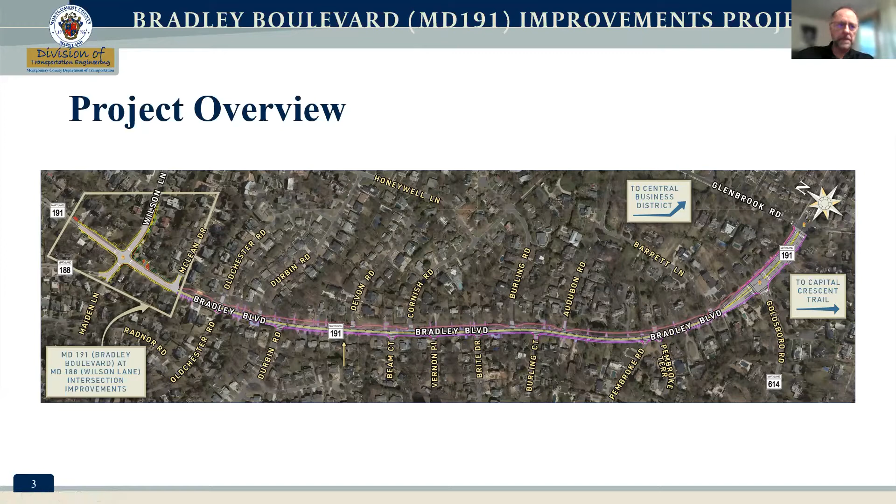Thanks, John. So I'm Mark Roberts with Whitman Requardt, and we are working on the design for this project. I was just going to give a little overview and then some of the history of the project, and then get into what we're working on now. So a little bit of the project overview, of course, in Bethesda, Maryland. And the purpose of this project is to start making connections to some of the missing areas or gaps in the bicycle and pedestrian network.

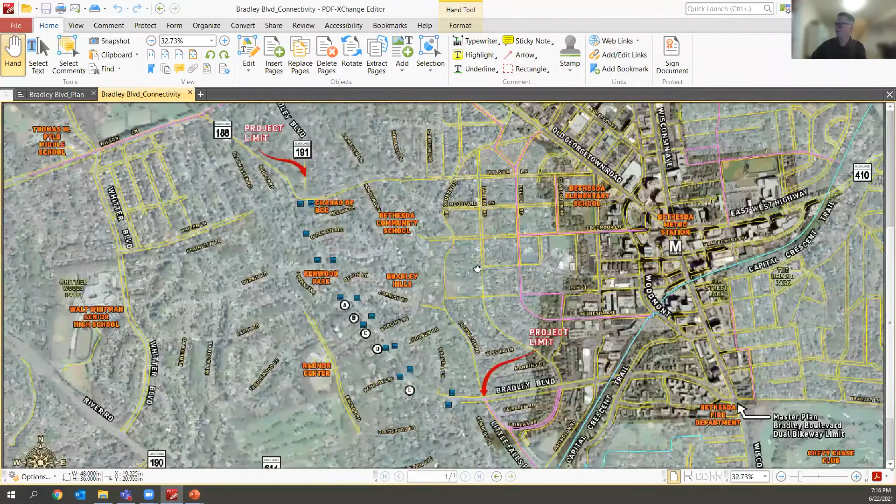I wanted to pull up this drawing, which we actually brought out at the last public meeting several years ago. It shows, it's a little busy, but everything in yellow is existing sidewalks, everything in pink is existing bike lanes, and existing separated paths are in blue, like the Capital Crescent Trail. Our project is here from Glenbrook to Wilson in combination with the intersection project. And you can see there's a gap here in any kind of network.

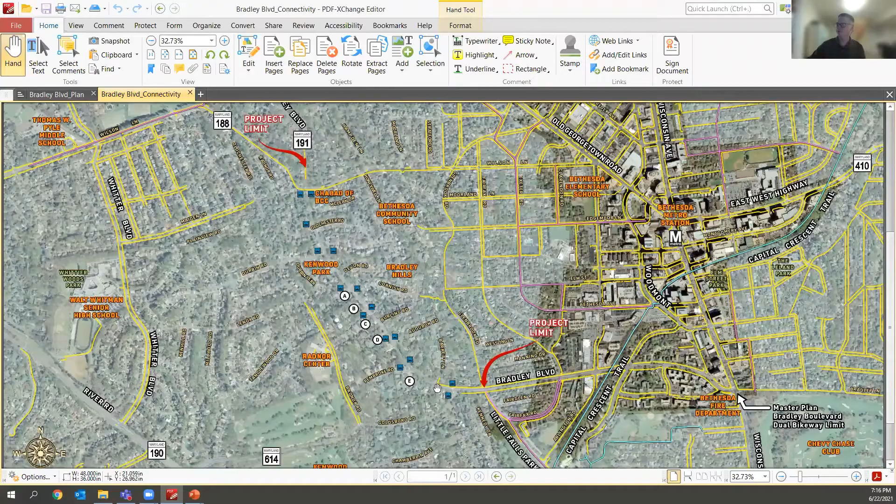And so that's really what we're trying to do, is connect this back up. The project will help improve pedestrian safety, bicyclist safety, and access for all users to transit into the Bethesda Central Business District and other points nearby. A little bit more of the overview.

John mentioned there'll be a shared use path or a side path. It'll be on the north side of the road. And to make sure everyone can orient correctly, that's what we're calling the north side of the road, the odd numbered addresses, the wide right-of-way side of the road. There will also be on-road bike lanes. There'll be a curb and sidewalk on the south side of the road, which is the even number addresses.

There will also be significant stormwater management and drainage improvements. As you're probably aware, there's flooding that occurs at some of the intersections in the corridor. There's not much of a drainage system out there to speak of today, ditch-wise or inlet and pipe system today. So this project would be partially relieving the flooding events as well as managing the stormwater from the new improvements.

There would also be traffic signal reconstructions. The intersection project John mentioned will come first and reconstruct the Wilson Lane signal. And then this project would come later and reconstruct the Goldsboro and Glenbrook signals.

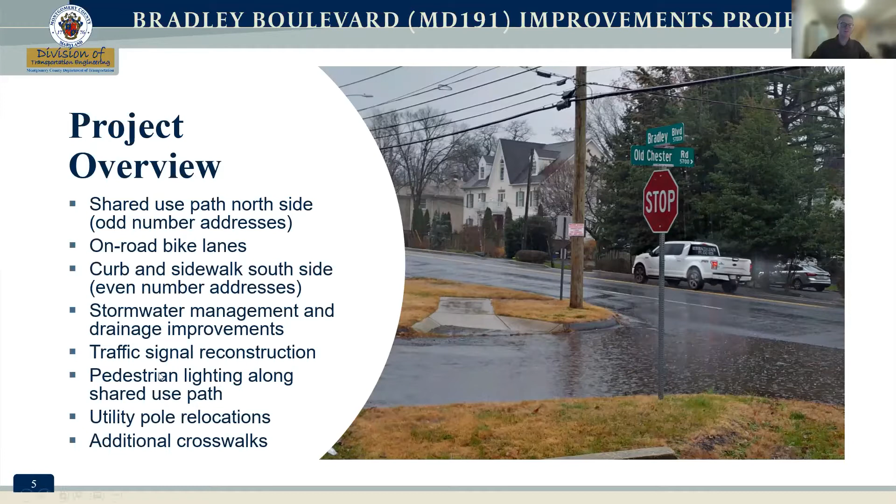So next up, I wanted to go over a little bit of the project history, not too detailed, but just to give you some orientation. It really starts with the master plan from 1990, the Bethesda Chevy Chase master plan, which called even back then for dual bikeways on Bradley Boulevard. Dual bikeways meaning shared use path on one side and then also on-road bike lanes.

And then this project really got its kickoff with a petition from the neighborhood for a sidewalk, and then MCDOT got the project going. In 2000, and I should also say in 2005, the countywide bikeways functional master plan came out and also agreed with the earlier master plan that there would be dual bikeways on this road.

And then in 2009, facility planning phase 1 began. The project, of course, started with the petition for the sidewalk, but we go back to looking at the master plan and the bikeway master plan to guide the planning of this project. There were public meetings in 2009 and 10, and the phase 1 facility planning completed in 2011, and then it was recommended by the county council T&E committee to proceed on to phase 2 facility planning.

That began in January of 2012, and it concluded a little over 3 years later in 2015, ending with a set of what we call preliminary design plans around the 35% complete level. We also had another public workshop at that time.

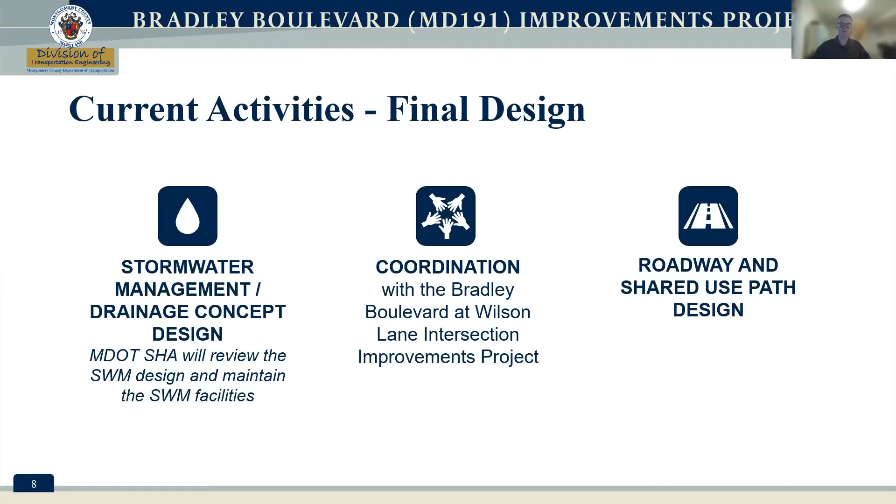Now, this is the heart of, one of the main reasons we wanted to come to you tonight, and that is to go over again - this was out at the public meetings years ago and it's been refined a little bit - the typical section of the project.

Starting on the north side, on the odd address side, we have the wider right-of-way existing condition. This will be the side with the shared use path and utility poles to be relocated.

One feature I wanted to point out with utility poles is that we're going to plan to have them fit between the path and the swale, instead of out on the outside of the path. That will help minimize tree impacts, because utility poles need a very wide swath for clearance to the electric lines. So if the poles were to wind up on the outside, you'd have to start that clearance envelope out here and cut a lot more trees down. But if we put it here, we can take advantage of the space that the shared use path takes up. So that is one key element we're working on.

Next up, you'll have a swale to handle storm drainage and stormwater management for the project, and that varies in width. Then we're onto the road, and the road would become more uniform. Today, obviously, the shoulders vary in width. You'll have two 11-foot lanes, which is down from the existing 12-foot lanes on average. And then there will be bike lanes.

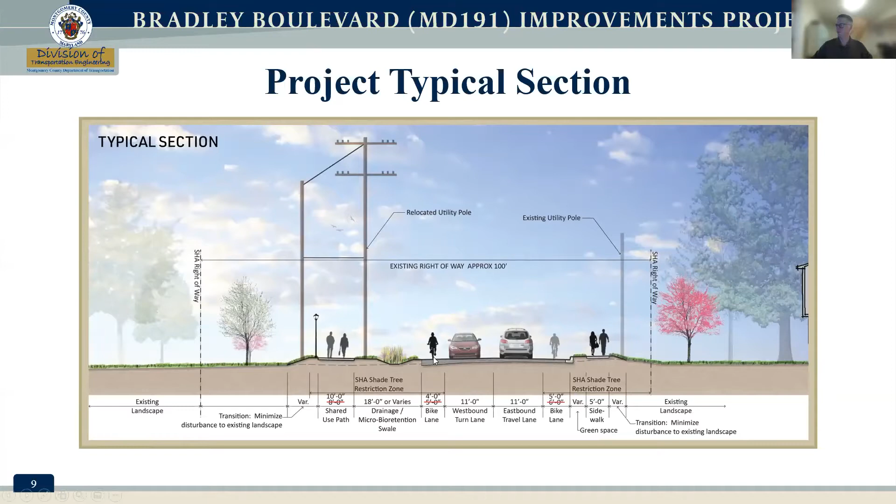Some other efforts are going on. I mentioned earlier, starting to coordinate with utility companies, which includes Pepco, Verizon, and Comcast, and others on the pole lines. There's also going to be some generally minor water and sewer adjustments, hopefully mainly to things like fire hydrants and valves, and we'll do our best to work our design around and minimize these impacts. Same thing with Washington Gas, coordinating with them for any necessary relocations, but trying to minimize those. And of course, landscape design and tree save plans to maximize the number of trees that can be saved with this project.

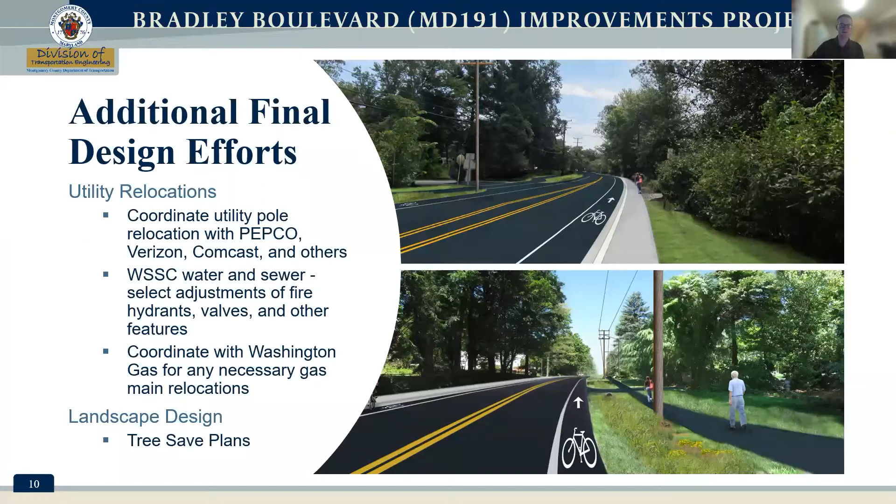Last, some other efforts coming up are the traffic design. I mentioned there'll be more crosswalks. Today there are crosswalks at the signalized intersections, and one unsignalized crosswalk at Bright Drive. After coordinating with State Highway and the County Traffic Division, we are looking to add 2 more unsignalized crosswalks at Durbin Road and Pembroke Road. That would split this corridor between Wilson and Goldsboro into roughly thirds, giving more opportunities for crossing and getting to the shared use path. Other traffic efforts include developing a design for maintenance of traffic during construction, signing and marking, lighting, and traffic signal design.

Before this project goes to construction, there will be a public hearing that could occur sometime next year or into the following year.

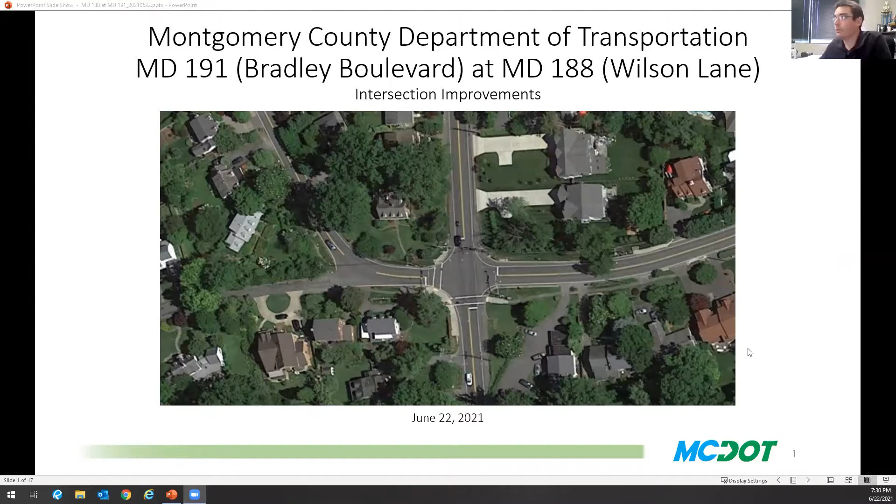As mentioned, my name is Mike Giuliano. I work for SCV Incorporated, and I'm working as the consultant project manager for the intersection improvement project located at Bradley Boulevard and Wilson Lane. I've got a few slides here to discuss with you all and share what we're doing. As mentioned, this is a breakout project that the county brought out. It's going under as part of their spot improvement CIP.

It came out from the review comments as part of the Phase 1 study from the Bradley Boulevard Bikeway Facility Planning Study, which recommended left turn lanes be installed for all 4 approaches at the intersection. This is reinforced in the 1990 Bethesda Chevy Chase Master Plan, which recommends adding dedicated left turn lanes to reduce delays at the intersection. So that's a little background information.

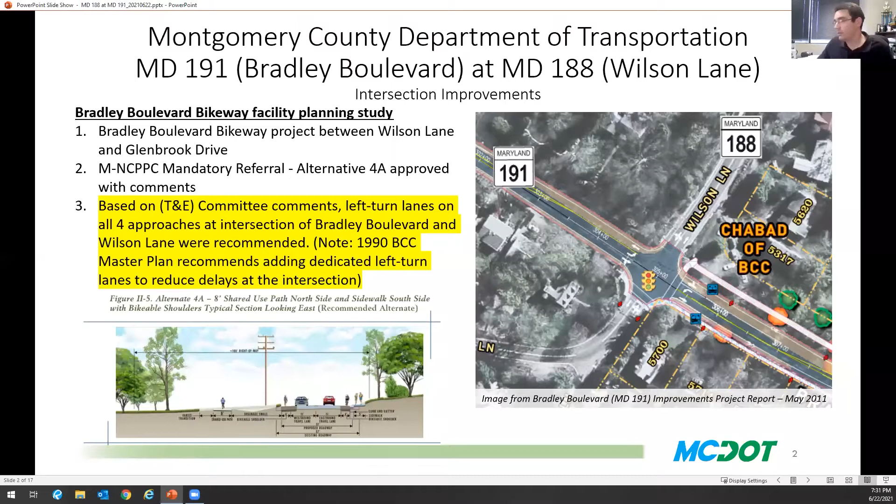The first part of our project began with a traffic study. We went out and collected traffic volumes in 2019 to prepare a synchro analysis, which will help determine the operational impacts of the project. We compared that with existing conditions to determine the required length of proposed left turn lanes needed for each direction, and also if any additional left turn signal phasing was needed. The study began in 2019 and concluded in 2020 with SHA's approval.

The bottom table here indicates the total turn length that was required based on the analysis, which stemmed from the volumes collected. Each direction was different, due to the number of vehicles. The tables on the right show the existing operational data and the proposed, indicating the delay shown for each condition. In the existing condition, during the AM peak hour, there was about a 17-second delay overall for the intersection. In the PM, it was 30 seconds, so a little more drastic. With the proposed conditions, we see a slight improvement in the AM and a more significant improvement in delay in the PM.

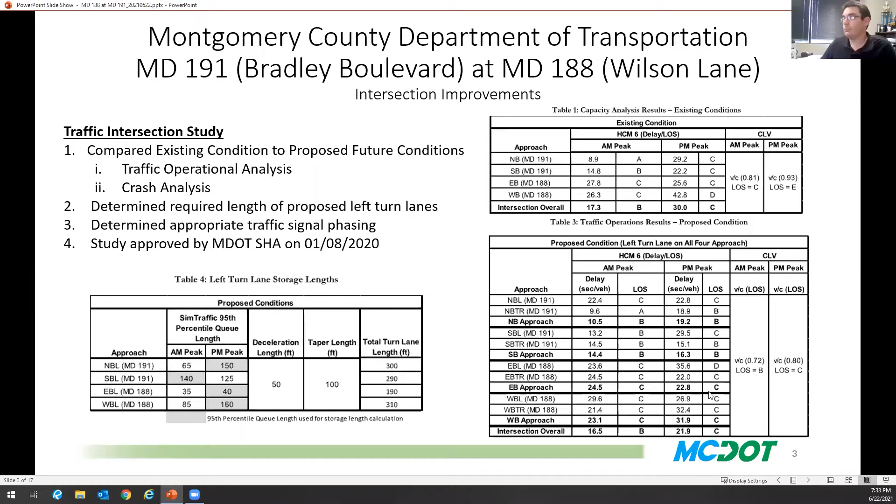Going forward, after getting approval on the study, we advanced our design. The geometric improvements include widening along both 191 and 188 within the right-of-way. This more significant widening is along the north side of Bradley Boulevard. We're adding dedicated left turn lanes for all approaches, and 5-foot bike lanes along Bradley Boulevard within our project limits. All existing sidewalk out there will be rebuilt to be 5 feet wide and concrete. In addition, if you're familiar with the intersection, there's a section where the sidewalk along the south side of Bradley just ends. We'll be connecting that to the intersection so pedestrians can utilize the existing pedestrian crossing.

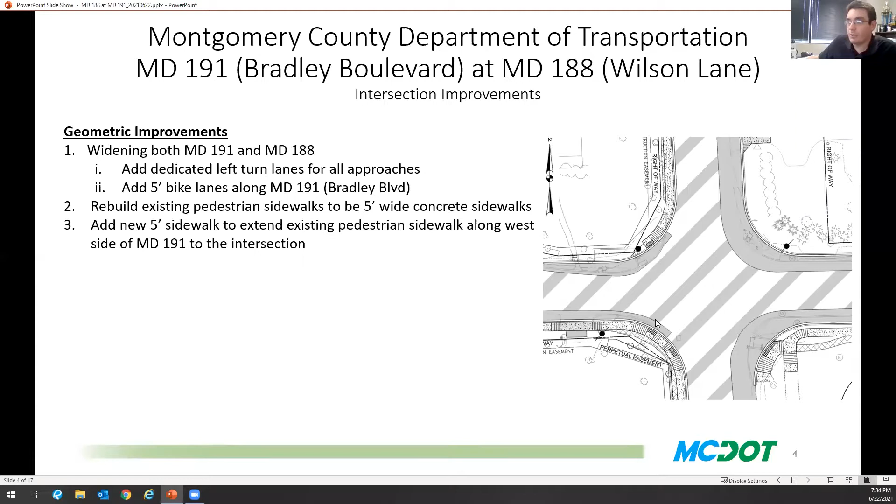This gives you a little overview of what it'll look like along Wilson Lane. Our project limits extend - looking north is straight up on your screen here. To the west, along Wilson Lane, it's about 200 feet. To the east, towards Bethesda, it's roughly 400 feet.

Along Bradley Boulevard to the north, the project extends about 350 feet from the intersection, and to the south roughly 300 feet, basically to McLean Drive.

Our improvements are working hand in hand with the bikeway project to make room to account for the shared use path, which you can see here. It's a general location until design is started, but we're making provisions so there is room to connect the shared use path all the way up to the intersection.

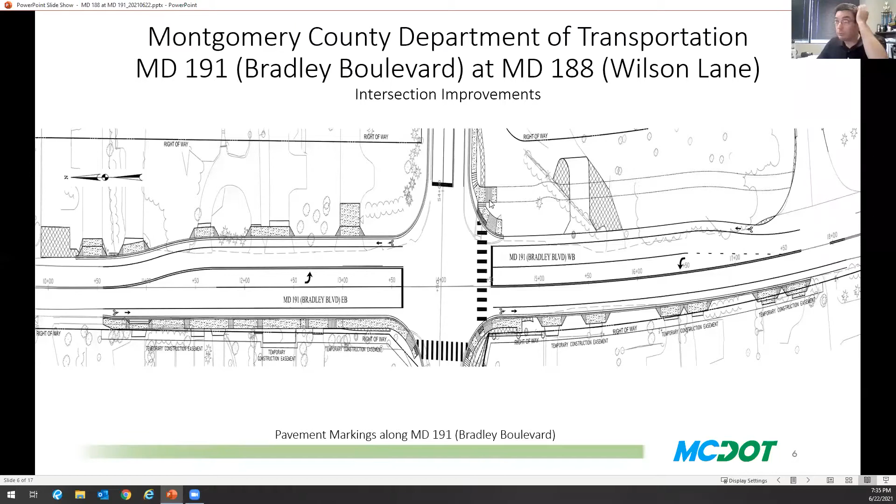As Mark mentioned, there are significant drainage deficiencies in this area, and at the intersection, pretty much non-existent infrastructure when it comes to drainage. So we will be rebuilding that, adding a lot of storm drain pipe and new inlets throughout the intersection and the project limits.

As part of the project, being in SHA right of way, we do have to go for an SHA access management permit to do the work within their right of way, so there are certain requirements when it comes to drainage and stormwater management that we have to meet.

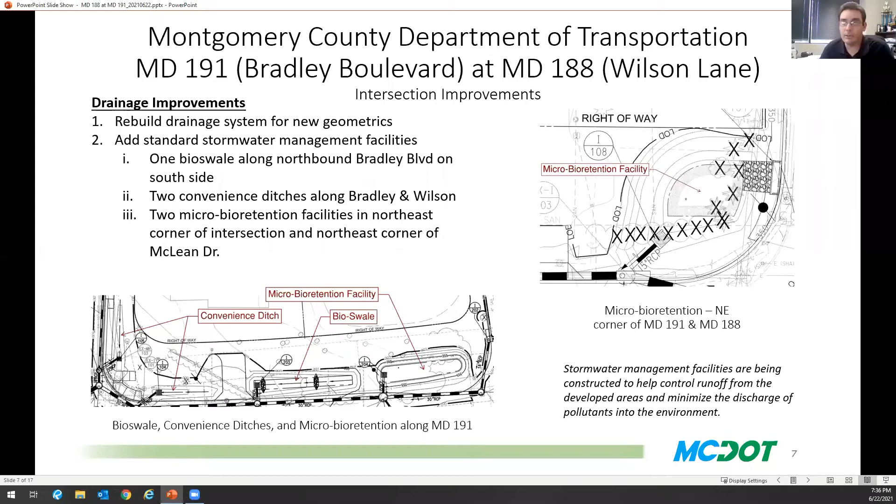As part of that, we are introducing one bioswale along Bradley Boulevard, in between the intersection and McLean Drive on the south side. We also have a couple of conveyance ditches along with two micro-bioretention facilities: one in the northeast corner by McLean Drive, and the other in the northeast or northwest corner of the intersection of Bradley and Wilson. That's to meet the stormwater management criteria the state is holding us accountable for.

In addition, with every widening project, we have a number of utility poles being relocated, as well as I think three fire hydrants. There's also a new air vent main box that was installed previously that needs to be relocated, which we're working with WSSC to get approvals on.

For the most part, everything is within the right of way. There is a small section at the southeast corner where we need to get a perpetual easement because of drainage with the new alignment. There are also a number of temporary construction easements, since we're doing work tying into existing driveways along the south side of Bradley Boulevard and along Wilson Lane.

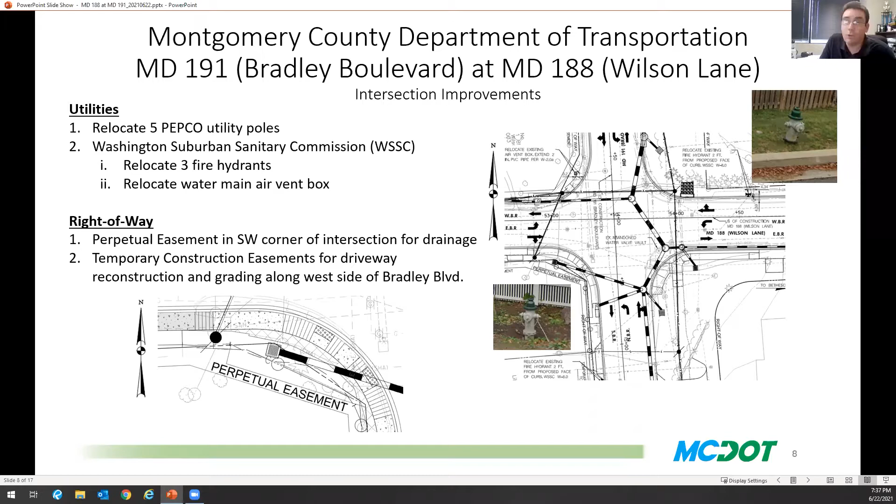We also have some landscaping. In all areas of excavation where we'll be installing drainage and widening, we're going to put back some ornamental and evergreen trees, shrubs, and some perennial and ornamental grasses, basically replacing what is removed as part of the project. It won't match exactly, it'll be more towards SHA standards, but we'll be putting back a lot of stuff to make it look nice and not look like we've come through with construction.

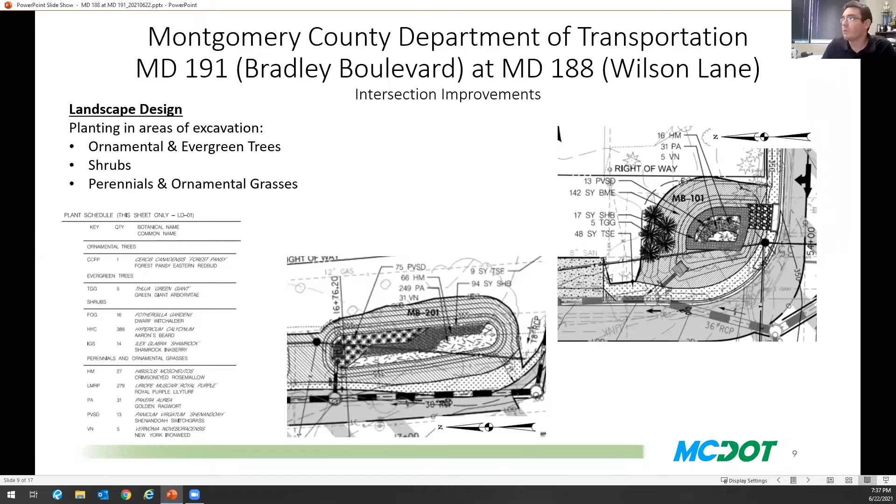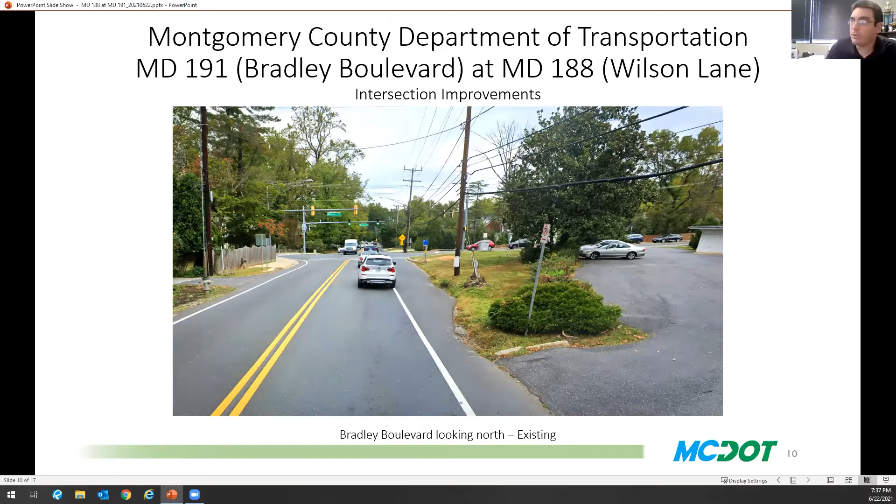View looking south. Again, you can see on the south side the sidewalk is continued all the way up to the intersection, connecting it.

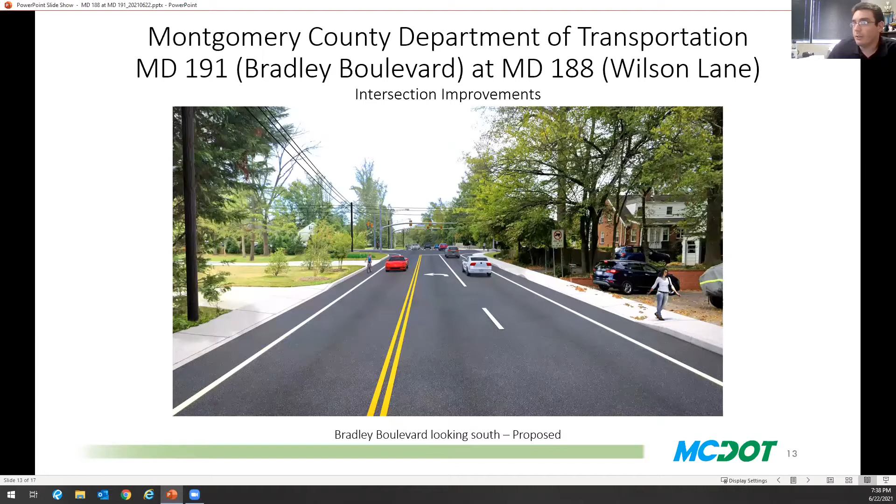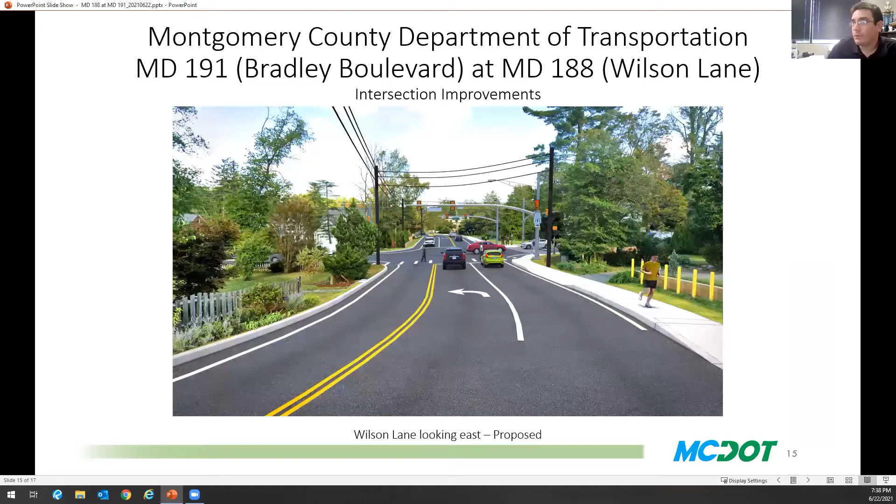This is a view looking east along Wilson Lane coming around the curve, showing the new left turn lanes. And then the opposite direction looking west, showing the sidewalk with the left turn lanes.

That concludes my presentation.

Okay, I guess we're going to start with the question and answer phase. Guys, I have a number of questions. Actually, I was thinking we should probably go ahead and start with the questions that came in through the chat. I've jotted them all down.

First, why does the bikeway not go to Fernwood? John, just trying to get my picture up there. Well, like any project, we have a finite scope.

We're going by what was handed to us as far as the feasibility study, and the limits were as they are now, except we removed the intersection improvement project. Ultimately, we'll implement all of the bike facilities for the countywide master plan, but it really comes down to funding and impact to people. We can't simply build every facility out there in one year, it would be impractical, impossible really. So you just have to wait. This project is really kind of past due. It gained life back in the early 2000s, and here we are just getting into the design of it, looking at maybe 2025, 2026 before we really get into construction. So that's where we are with it.